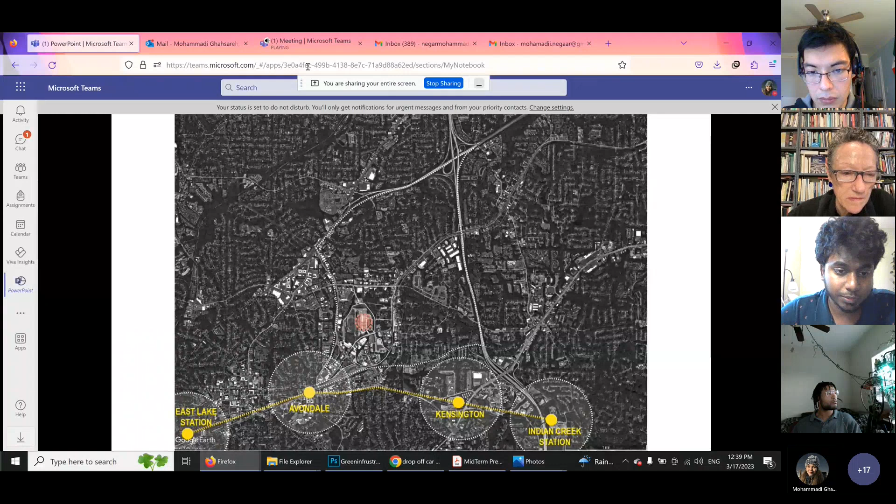The white circles are the ones with the one mile radius. One of the main things that we noticed that was important in a site was the proximity to the DeKalb Farmers Market and how users can easily access it from the closest station, Avondale. This makes Zone 4 a portal towards Scottdale.

This is also enhanced by the fact that it's run through by the East Ponce de Leon, which covers the entire length of Scottdale and also touches upon all 4 zones. So East Ponce de Leon is a crucial factor that we had taken into consideration as to how we are going to treat it to enhance the experience of this neighborhood.

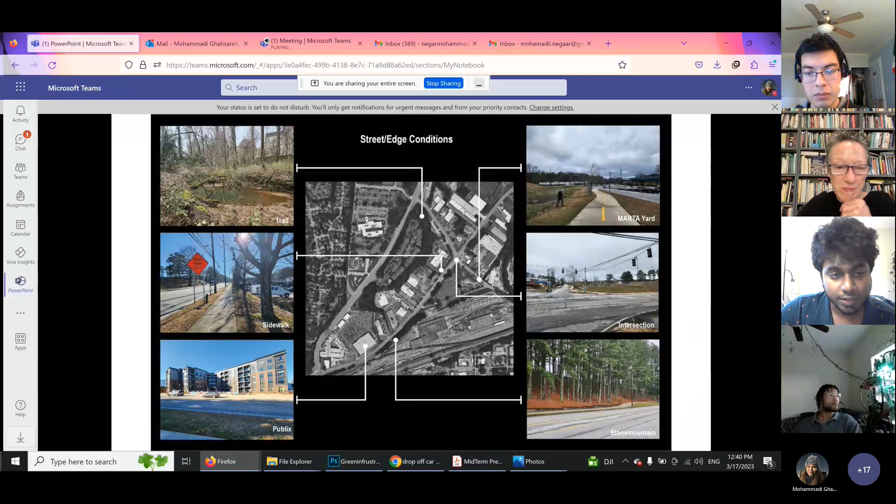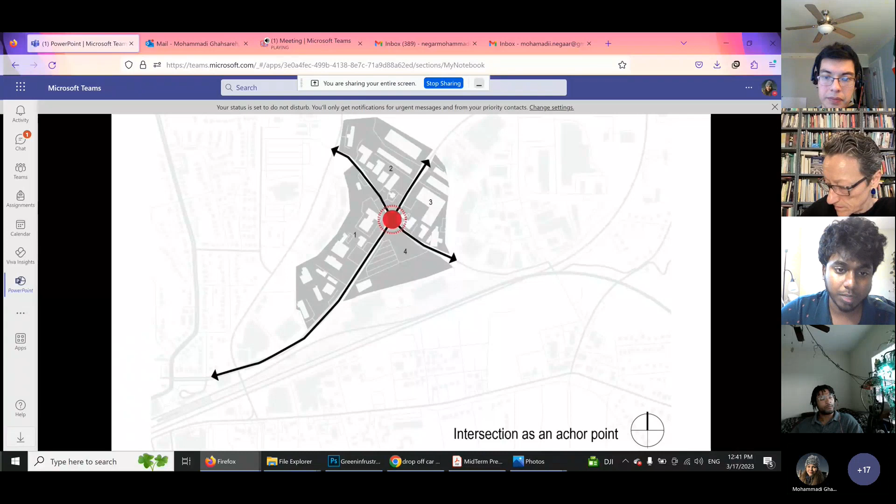As we go further, we found that this intersection demarcates our zone into 4 distinct portions. Parcel number 1 is where most of the car businesses and some Oriental market spaces are happening, parcel 2 is where a lot of dog businesses are happening, and parcel 3 has some storage warehouses and more car industries. Part 4 is where the MARTA property is, which was one of our biggest opportunities in terms of development.

We also took a study at how the density is working around our site. As you can see towards the left side, there are a lot of smaller residential units, but in our zone especially there was not much residential development taking place. So maybe that was the reason why there was a lack of sense of neighborhood throughout this zone.

We also took a look at what are the parcel allocations throughout the site to understand how further development can happen in terms of laying out roads or car-free zones.

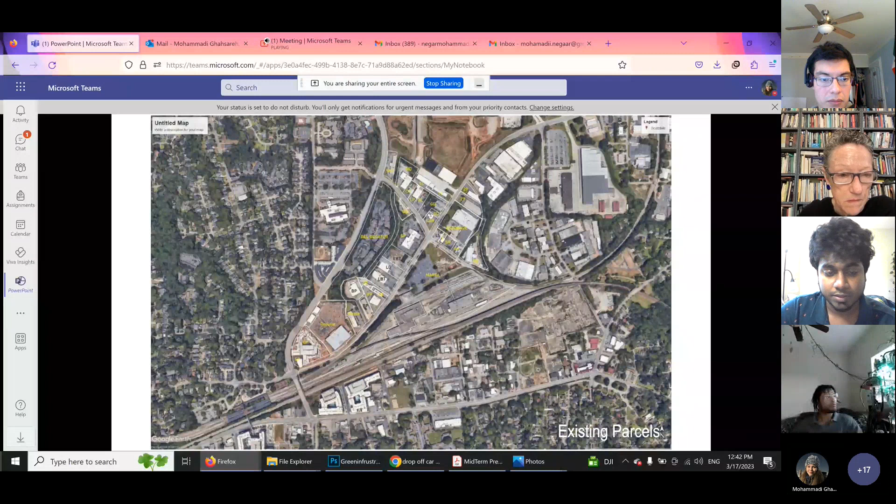There were 3 main issues throughout the site that we found. One of the first things was how parking was taking most of the frontages, because of which the pedestrian sidewalks weren't equally distributed. Most of the time we had to walk on just green spaces rather than sidewalks.

And the lack of public infrastructure throughout the area was imminent, whether in terms of recreational or leisure use—public spaces within this area were scarce.

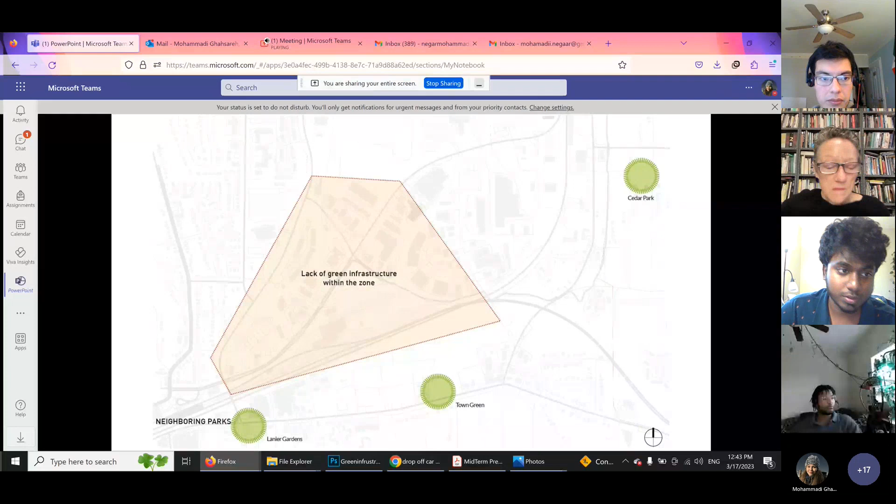Now Negar will be taking you through the approach of the design.

Hi, my name is Negar, and I want to talk about our master plan and our ideas. As Subhash mentioned, we had lots of challenges in our site, like the lack of connectivity, mobility, walkability, green infrastructure, and density. We tried to address all these issues.

At first, we realized that East Ponce Avenue is really important, as it's in the middle of our site, connecting the Avondale MARTA to the farmer's market. Also, the intersection with DeKalb Way creates a very important intersection that has separated our site into 4 different parts.

So we decided to put a mobility hub at this intersection because it would be more accessible for the residents, or all the users there, or the people who want to go to the farmer's market.

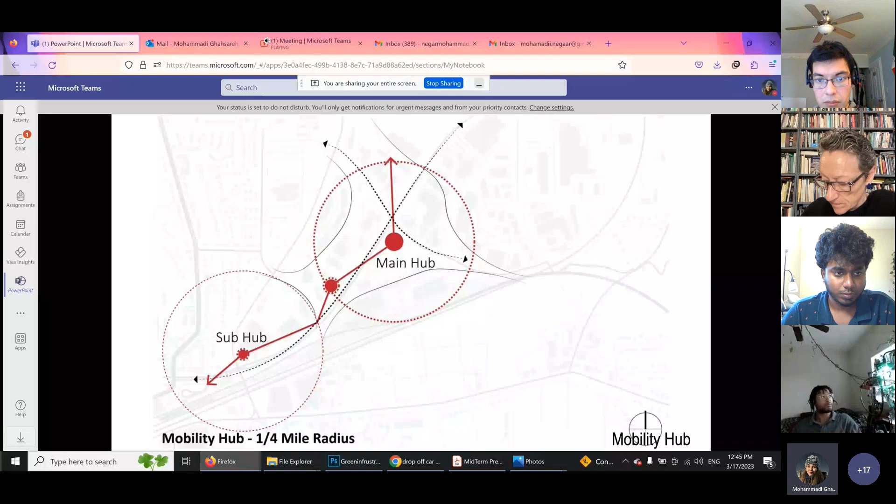We also have other sub mobility hubs in other parts of our site near the Avondale MARTA station. These mobility hubs would include drop-off areas, shared bicycles or scooters, and areas for rest with shade, making the place more pleasant for people waiting for the bus or their cars. This kind of area would encourage people to use public transportation, helping the area become more car-free and car-light.

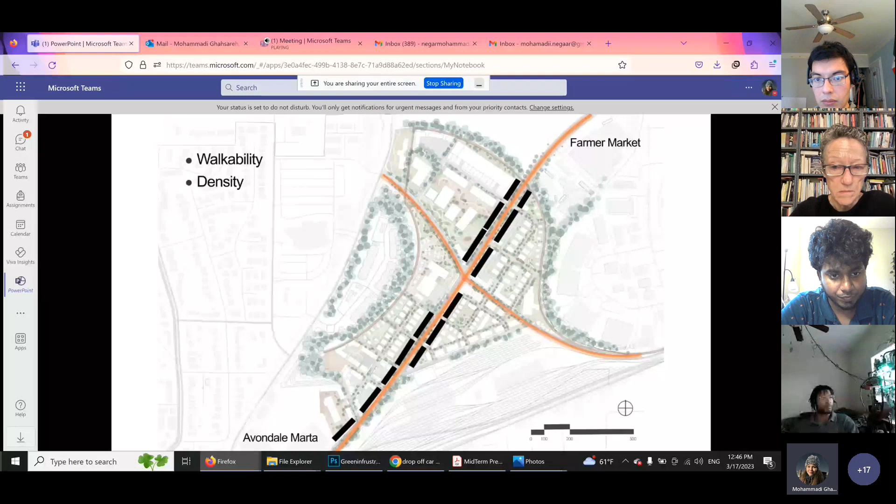The other thing that we decided is to work on the edge of the Ponce Street to make it have more density and put more buildings and retail there to activate it, so it would be safer for walking. In this area, we would have lots of retail, stores, and mixed-use buildings.

The other side of our design is about the green infrastructure. We realized we have very good green lines in our site, and we decided to connect all these lines together, thinking about how to make a strong connection between these areas with a strong green infrastructure in our site.

Now we have the Stone Mountain Trail in our site, but we decided to add another eco trail near our hard edges around our site and near the green lines. We also wanted to put more public areas in our site.

Here is the plaza at the beginning of the eco trail. This place we wanted to keep the building and make it a rec center with lots of sports park. Now we have buildings here with businesses related to dogs, and we want to keep the buildings and businesses and make this place a dog park. We also have a park here.

So our final public network would be like this - we wanted to make connections as much as possible between all these separated parts, with walkable streets, vehicular streets, eco trail, intersections, and public areas. We wanted stronger connections between all these layers.

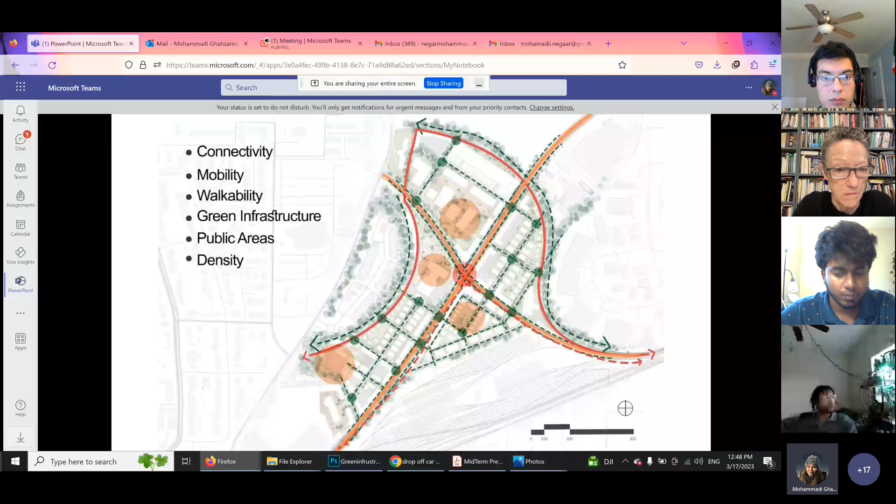For the building types, I want to start with MARTA. We decided to put lots of housing here for MARTA's workers, and in the next phases, we want to build residential on top of the rail yards.

We have the mixed-use building around Ponce Street, and all these yellow areas are the car-free housing areas, residential areas. The red areas are commercial - maybe offices, restaurants, cafes near the eco trail, and here near the trail again, also the antique shop and dog park. This area is the recreational center. And this is our final design.

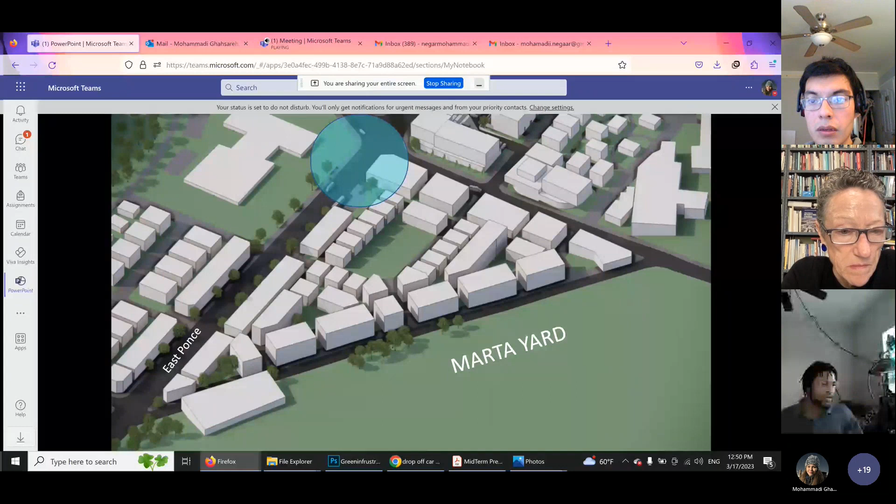Starting with the MARTA hub and MARTA yard, at that intersection again you can see highlighted where we are going to put the MARTA hub to facilitate the car-free housing that we are proposing for the site at large.

This is a view looking from the location we're planning to place the MARTA hub. This is looking down East Ponce, northeast, and you can see the intersection again that we're highlighting, and how this would manifest in reality.

Moving across the street to more of the retail and housing farther back towards the eco trail, we are connecting North Arcadia Avenue to the rest of the lower site. As you can see at the lower left-hand corner, there's Publix parking that is dividing the site with about a 20-foot high cliff, and this creates a pedestrian barrier that presents connectivity issues to our site.

So we're using this creek that runs along the apartments that are along that trail, and we're extending the path up that elevation with a plaza where those two stars are, linking the higher portion of the site to the lower portion of the site, to the rest of the development and the housing that we're proposing.

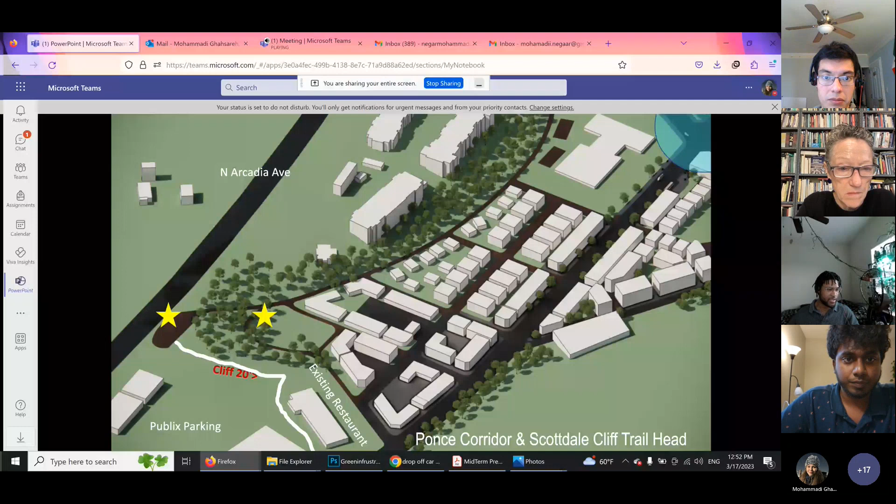These are some quick views from North Arcadia, at the top of that trailhead and lower where the creek would be. We have to add the creek, but imagine there would be a creek running along that path. That's what you'd see when you'd go to the site.

These are some views of East Ponce, the storefronts. It's actually in the wrong order - this second picture is actually in another zone, so I'll get to that in a second.

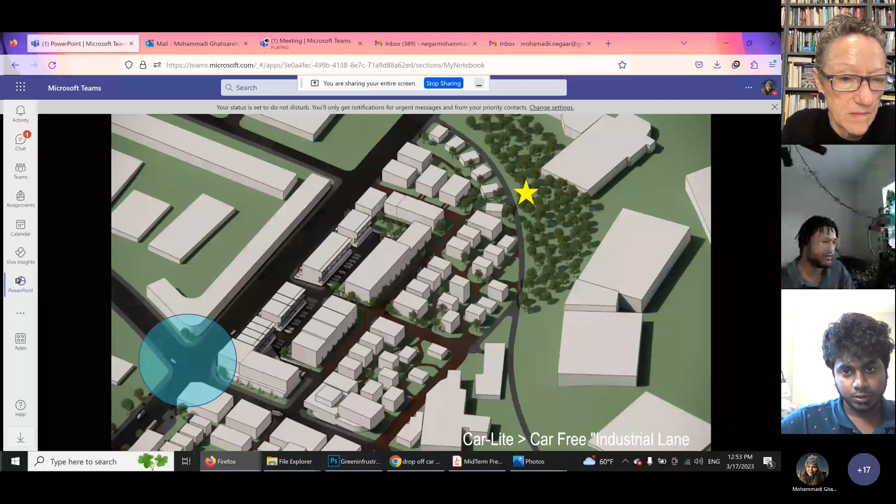That second picture was actually from the center of this car-free oriented neighborhood, at the intersection highlighted in blue. Along that street edge, we're activating with retail on the lower portion, and on the second and third floor we have apartments. Moving further back towards the star, what we're calling the industrial lane is adjacent to one of our other studio mates' sites. We have a trail running between that, extending the Stone Mountain bike path.

This is primarily to serve as a transportation artery for a lot of this car-free residential development that we're proposing. Ideally, this would be a transportation artery for alternative means of transportation, like bikes, scooters, and all the other electric means of transportation we have today.

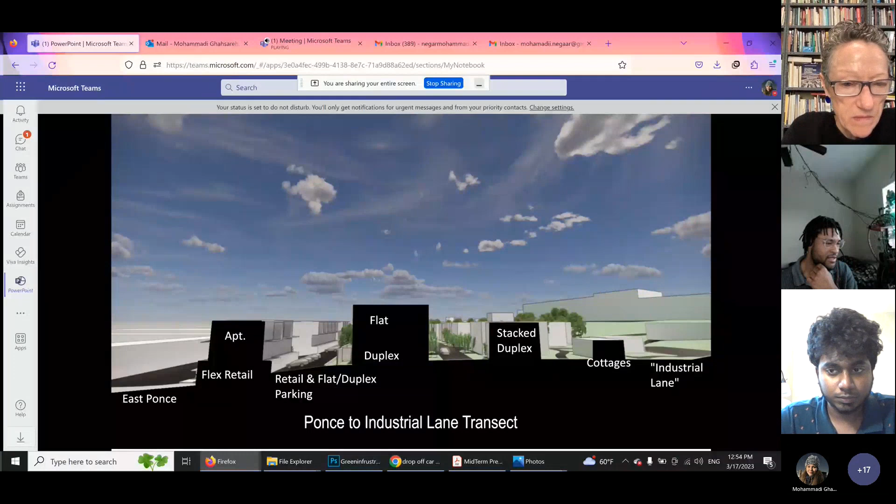Next slide. This is a section from East Ponce to the industrial lane, showing everything in between it with all the housing types. Next slide - you can see this one, same thing.

We'll just quickly run through this. One of the things that we were really excited about was the extension of the MARTA rail yard, and if we can actually build on top of it.

We're also thinking about how the density on top of the rail yard can happen - like, can it be really dense, or can it just have the character of the surrounding neighborhood?

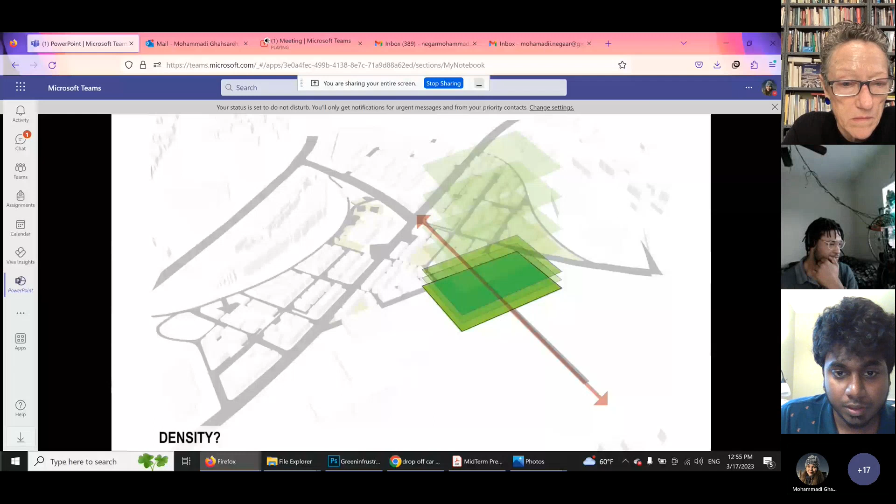This is kind of like the vision that we have for now, but this is something that we're still working on - how this neighborhood can also be a sustainable unit by itself, but also be integrated within its local context. So that's it from us.

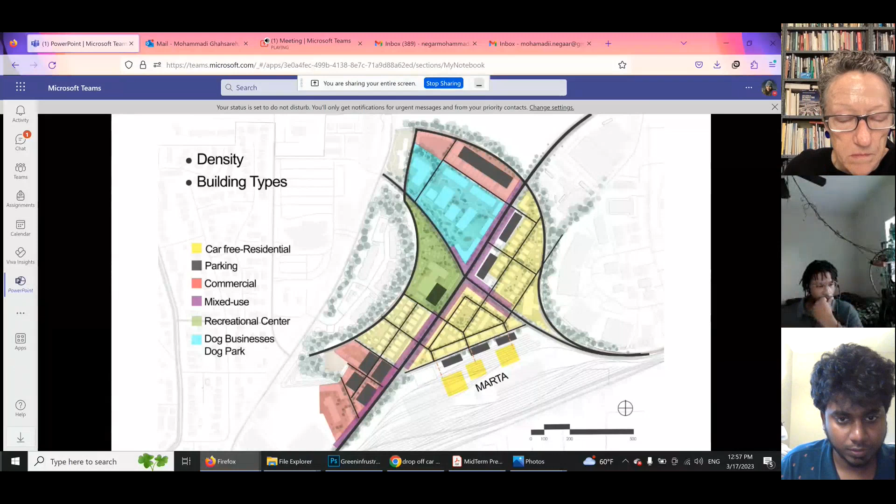The MARTA site specifically, I like the density on the surface lot. There was one image that showed parking in black rectangles on the south side before you get to the rail yard - yeah, right there. So I was a little confused when another slide later says it's car free, and I couldn't tell in the image if there was actually a place for parking, because I do think we have a chance of capturing a decent percentage of the workforce at MARTA to live in this community that would be created, but we also have folks that for various reasons might be driving from 45 minutes outside the city to get here. So I want to make sure we have that flexibility for those employees who choose to do so. But the overbuild is super interesting, super complex.

There are examples all over the country, globally, of overbuild situations, and generally you'll see most of them have very high density structures, just a function of trying to make the math work. But as Professor had indicated, that's not really what this exercise was about. So I like the idea you advanced of doing the overbuild.

I think that's really cool, but overall great job. Lots to think about, but I appreciate you guys putting your imagination to the paper, and thank you. Thank you, Jacob. Thanks.

I'll just jump in and add my two cents. This is Will with Microlife. Just to reiterate what Jacob spoke to, the connectivity of what you've put forward is great. I enjoyed you looking into the connection with the added path as well as the grid style connectivity, for the different people that live there that could walk to work or get over to MARTA. And obviously I'm a sucker for anything dog, so I appreciate you wanting to focus on the dog business and dog parks, but it's also a big thing for DeKalb County—they talk about wanting a rec center and places for people to gather.

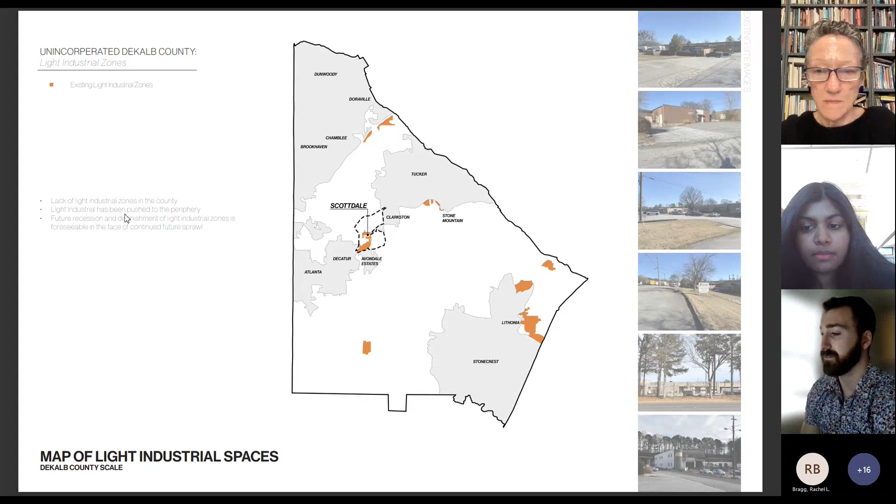Looking at a big stakeholder here, MARTA is currently employing about 755 employees at the Laredo facility, 80% of which are driving alone. If you look at this heat density map on the top right, a lot of the employees reside fairly close to the Laredo facility. About 60 to 75% of those people are eligible to carpool but don't, and about 43% have access to existing transit routes but do not use it.

On top of this, MARTA is aiming to be fully electric by 2040. Looking at the diagram on the bottom right, you can see the route off of which MARTA enters their bus depot site from East Ponce de Leon, with buses moving north to south, going through the wash bay, refueling, and then into bus parking. Employee parking is a surface lot at the northwest corner of the lot, with employee cars brought into the site off of Laredo Drive.

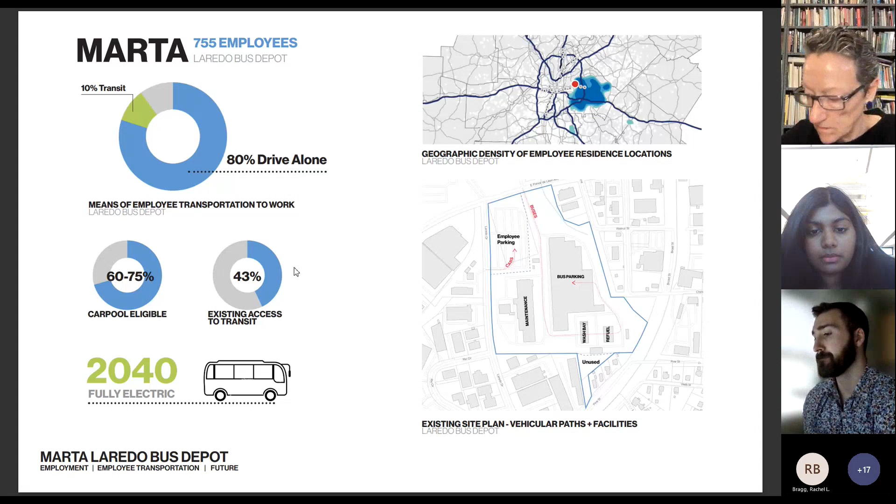So moving into our project, we're looking at how things could be here. Two main issues we're addressing are the future recession and diminishment of the light industrial space we highlighted before, and planning for MARTA's electrification by 2040, as well as addressing their workers' commute needs and workforce housing options.

This diagram shows the existing and proposed public space framework. The one on the left is existing, and on the right is one of the major changes we aim to do: rerouting the existing Laredo Drive to match up with the change in the DeKalb Farmers Market entrance that Team 2 would be proposing, enhancing this trail and adding more light industrial built fabric in the existing space.

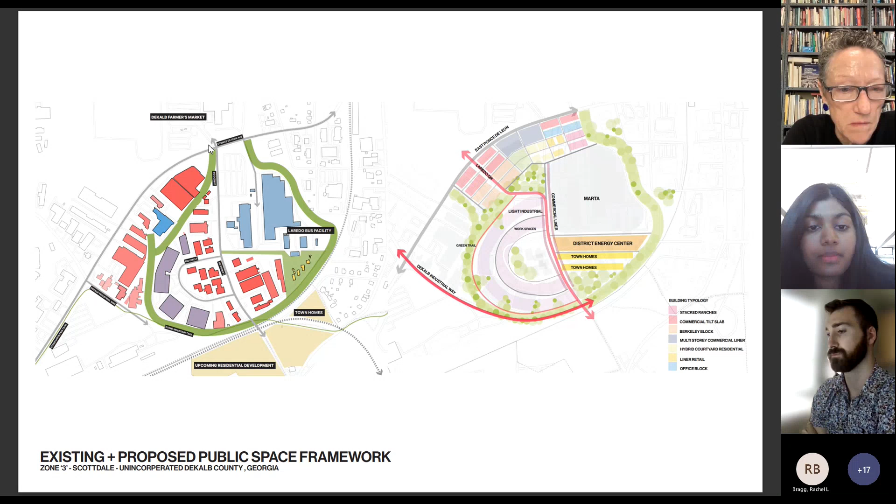Looking at our master plan, we're keeping this route down into the bus drive for MARTA's buses, as well as for public vehicles, which we're imagining will share a large shared parking garage with controlled access. Another major change is shifting Laredo and adding densification with commercial business storefronts along Laredo to change the current condition of the road. At the north end of the site, we're adding housing and car-free spaces that increase retail, mixed use, and a very diverse typology of buildings.

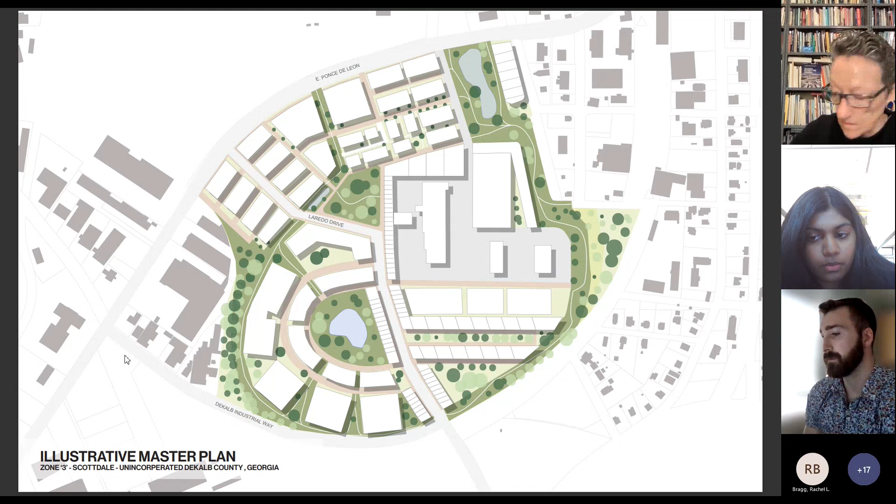So towards the north end of the site, we have specific building typologies that we thought would help us in densifying, but also diversifying the kind of buildings that we put. We wanted to put hybrid residential buildings and also commercial liners that are multi-story, so that it's sort of mixed use with offices, retail, and commercial spaces.

And then we've done a quick calculation to see the obvious conclusion that an increase in density in this area is going to increase energy consumption by some amount.

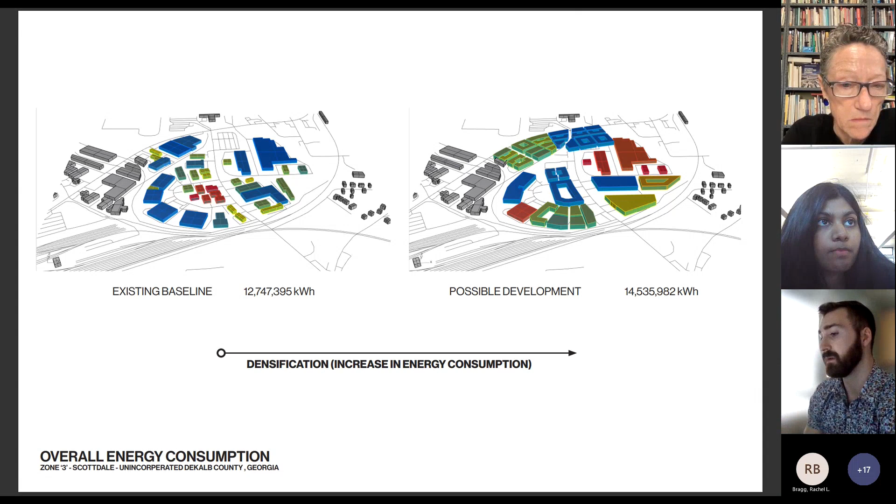And then, of course, now we're going to be looking at MARTA's electrification by 2040. And we're responding with establishing a district energy system, constructing workforce housing. We're creating live, work, and pedestrian-friendly mixed-use infrastructure. And we're planning for outdoor thermal comfort to reinforce that car-free living.

So as Matt had mentioned, we aim to create a district energy system on site. We thought it could work using the light industrial waste that could be generated, but also looking into the organic food waste that the DeKalb Farmers Market might contribute, to process it, and also to use the existing solar and other energy systems on site to create this sort of circular energy system for the site.

And by doing so, we're providing for infrastructure resilience in terms of transit. We're creating a source of sustainable energy. And then we're also thinking that this could be an economic asset for those who are being serviced by the energy that's being generated on the site.

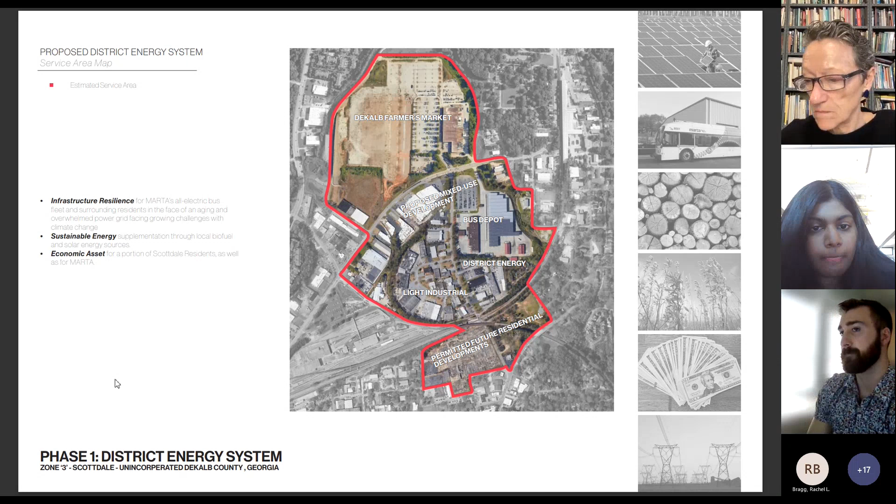And this is also a diagram to show where we see our car-lite and car-free zones, and how we have aligned our street network. There was a wind study done to understand what would enable good wind flow and movement into the site, and we coherently did our street networks according to that.

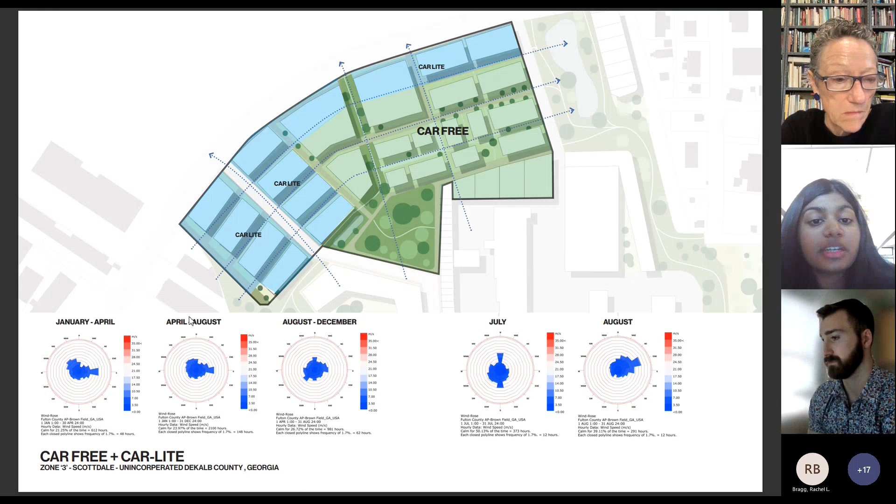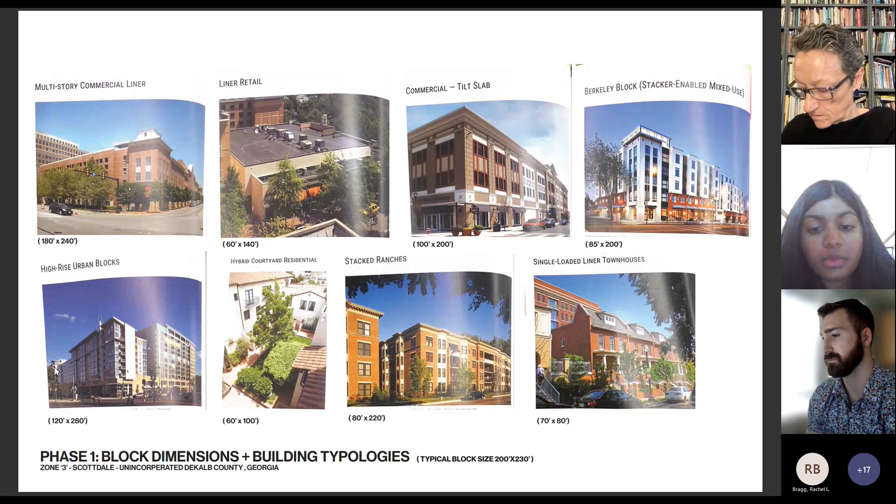So this is just to emphasize on Laredo Drive again. As you can see, there are smaller parcels that we have shown here, to establish a sort of densification along Laredo. We wanted to make it more pedestrian oriented, with pedestrian oriented businesses present, so there is interaction between the businesses and people walking by. We wanted to keep the scale smaller, looking at these liner retail type buildings along this edge.

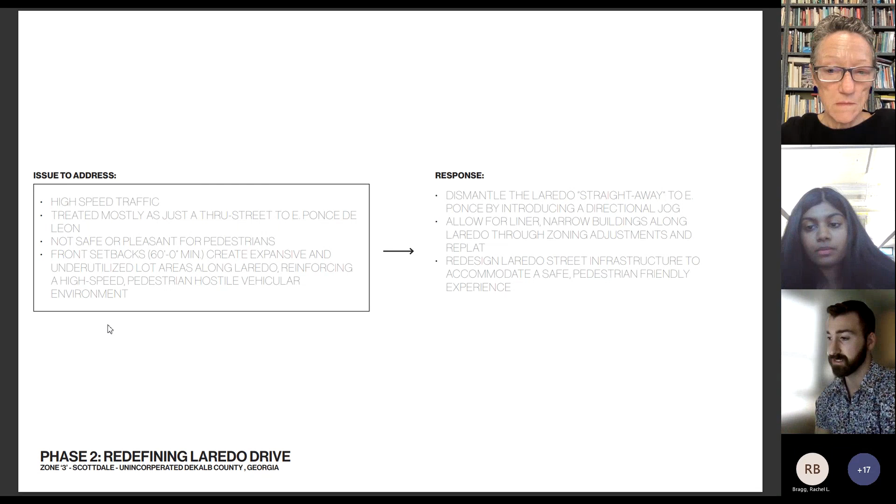Our biggest concerns are the high-speed traffic. It's being treated mostly as just a through street to East Ponce. It's not safe or pleasant for pedestrians, and the front setbacks, according to the zoning code, have to be a 60-foot minimum. We see an opportunity to close those setbacks by adding storefronts, reinforcing the idea that traffic should be slowed and this is a more pedestrian oriented space. That's why we're looking at dismantling the Laredo straightaway as it exists, accounting for those liner buildings, and redesigning the Laredo street infrastructure to be less of a road and more of a street.

So these are some of the smaller scale businesses that I previously discussed along Laredo Drive. We wanted to enhance it as a street rather than just a roadway. These are the liner retail buildings that we're looking at.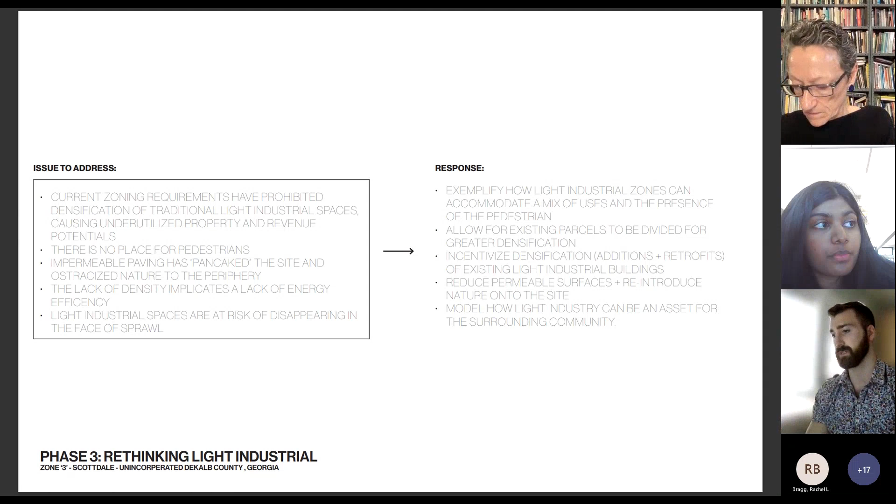The issues in those light industrial spaces are the zoning requirements that have disallowed densification of the traditional light industrial space. There's really no place for pedestrians. The impermeable paving has pancaked the site and ostracized all of the nature to the periphery. The lack of density implicates a lack of energy efficiency, which we showed before, and the light industrial space is at risk, as we've continued to say.

So we're going to try to keep the light industrial space present. We're going to try to bring in the green spaces and the pedestrian sphere. We're going to allow for existing parcels to be divided, and we're going to incentivize densification of existing light industrial buildings.

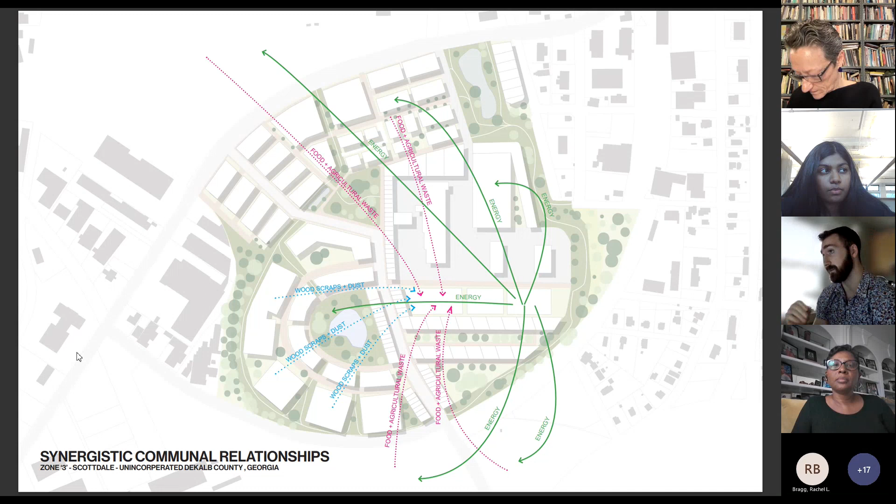This is again a diagram to show the different kinds of resources that we'll be using for supplemental energy production on our site, in the district energy center.

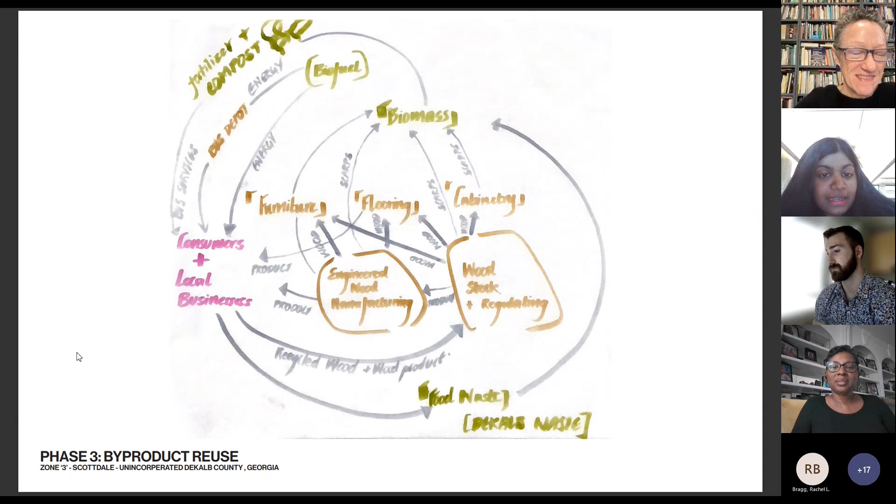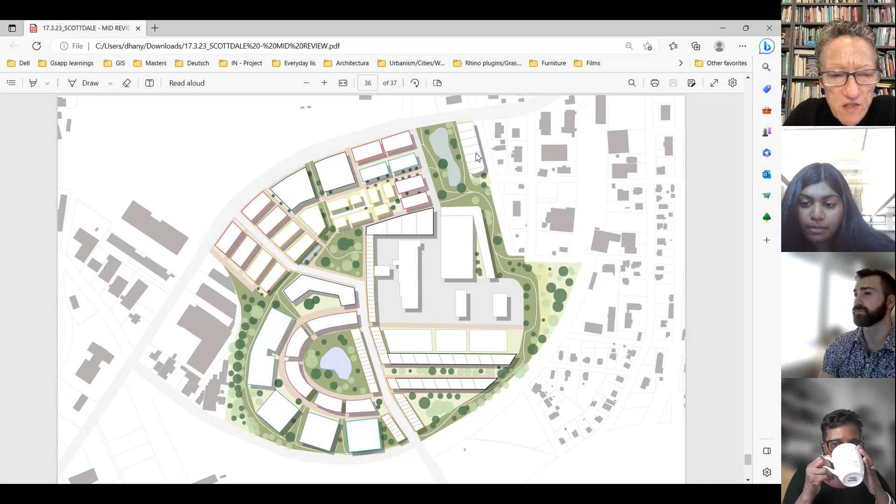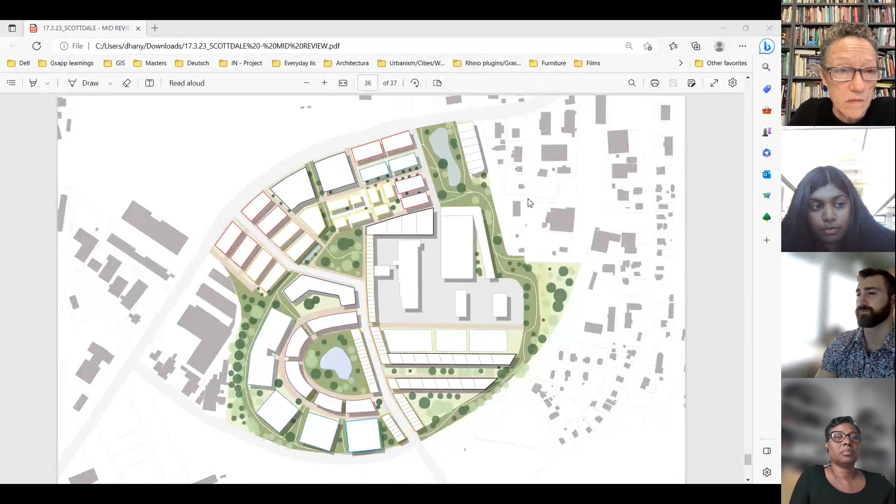Great point, absolutely. Different suggestions might have different levels of feasibility. If you group it all together into one, that might give the impression it's all or nothing, when some of the suggestions could be incremental improvements you can make, even if you can't do most of your suggestions. Which I think they absolutely could.

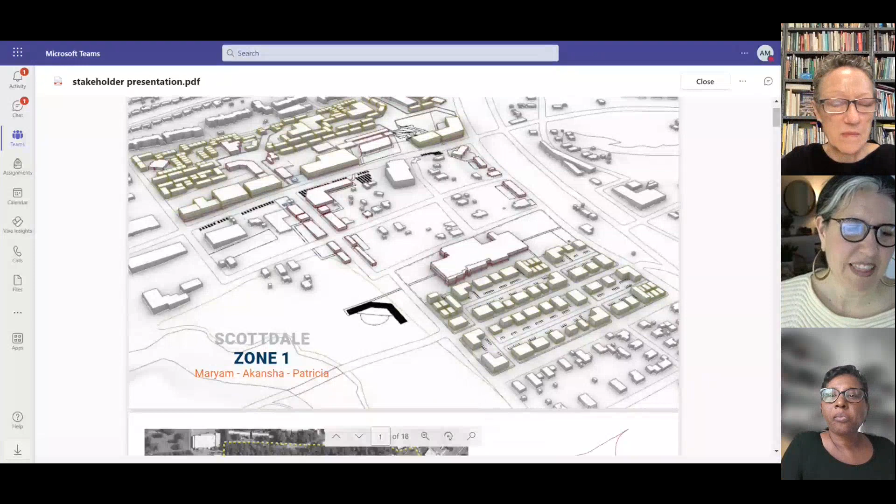Akansha, you okay? Yeah, I don't know why it's acting up at the right time. Just give me a second, please. Should we? I'm just going to share. Akansha, would you like us to? We can switch to team 2 and come back, give you time to figure it out. Did you? No, you got it. Yeah, awesome, okay, cool. Okay, sorry, I'm Akansha, and we are, as Patricia said... Go ahead, Patricia. All right, I think we can move on. Is it now moving the screen? Yes, perfect.

Okay, so this is where we're at. That big road that you see in the upper quadrant is North Decatur, and it is intersected with East Ponce to the east side.

We have three main drivers to our project. We felt that in our site visit, we met many of the residents, and what we were really told to do was to forage around for a town center. The responsibility we heard was that we still needed to honor very much the artistic community we saw within that neighborhood, and also support self-sufficiency. We studied what was available, and of all the amenities within all of Scottdale, what came forward, not surprisingly maybe, was a strong emphasis on the arts. So 11% of all the amenities in this fairly small community is all arts related.

Our zone is the most residential, and it's not very dense. When we did a study of walkability, it had a score of 45 out of 100. Our aim is to get it closer to 100.

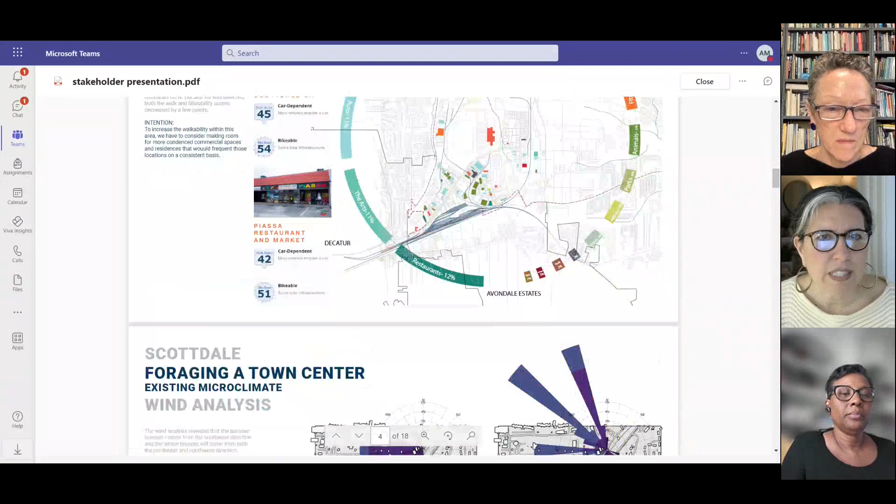We did some environmental analysis on wind and on solar. So we're showing you the wind first of where it comes in during the summertime, which is the southwest, and where it comes in in the wintertime, which is the northwest and the southeast. The wind, fortunately, is not so strong here in Atlanta to cause major design interventions, but it is something that's nice to have.

A cool breeze in those hot Atlanta days is fantastic. The solar analysis is probably the more significant one. So we really need to be concentrating on shading due to the intense sun, both in summer and winter, that affects this area and all of the city.

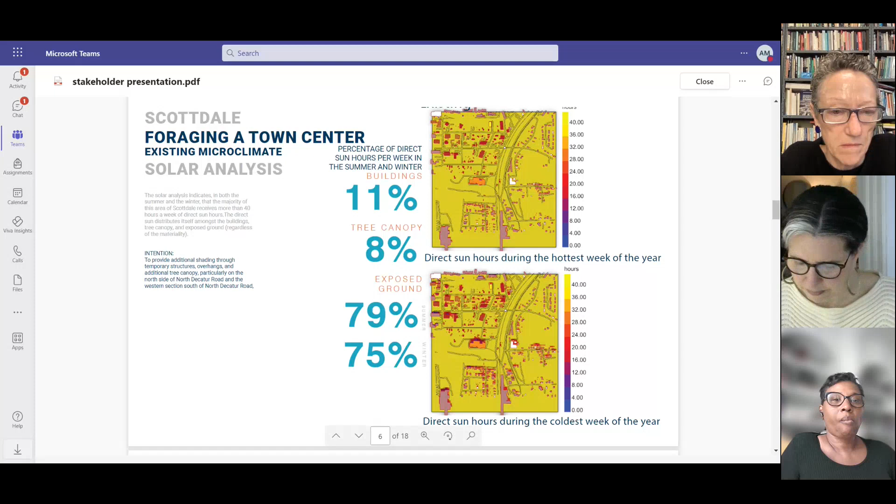When we went on our site visit, the intersection of North Decatur and East Ponce was where the community said we really needed to put the town center. However, that is the low point of that line, and so it would be a hike to get to anything that was available at the high point. So you're going to see shortly that we're proposing actually that town center being shifted a little bit west, an intersection that is street accessible.

Okay, so based on the analysis and the drivers, these are the outcomes we would like to produce that will result from our proposal. So to say, the design strategies would be to slow down traffic, create more mobility hubs, increase walkability, have more micro businesses engage in the area, a resiliency hub, and definitely open the public access to the creek.

So our master plan is mostly divided into 3 incremental phases. This is the Mill Village, definitely the storage area, the southern side of North Decatur, or one part of our town center, and the super block that is above.

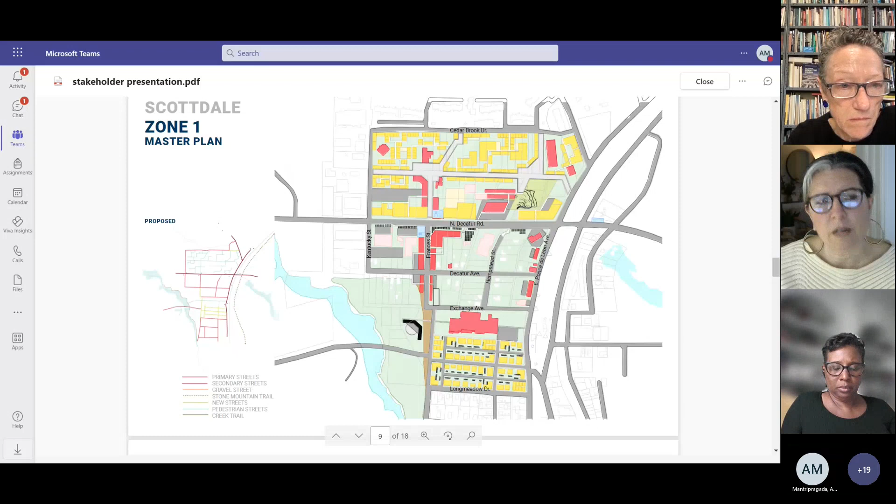But also a future resiliency hub, which I'll discuss in a slide or two. Also, we would like to have more pause points or nodes at intersections of streets that would probably enhance the experience for a person walking along the street. That would also open up more open spaces towards the creek, an OAT or an open air theater, so to say, a playscape that is on the super block, and incorporating more patios.

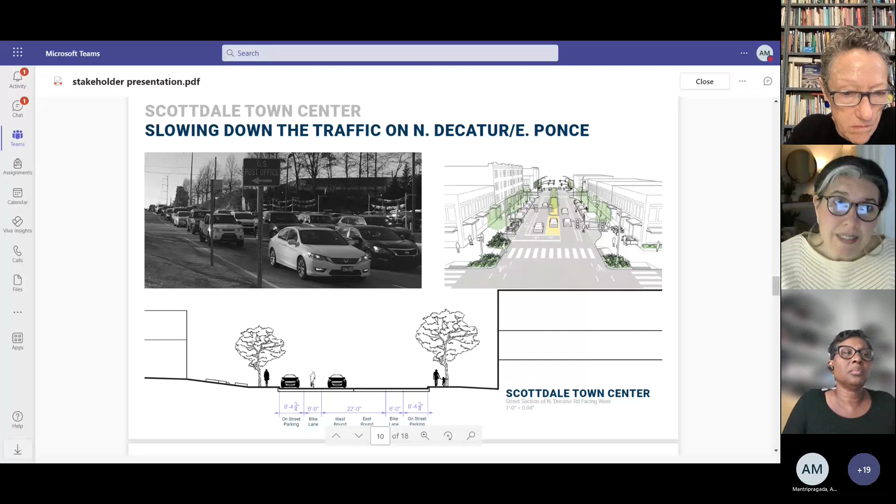One of the main things we need to do is address North Decatur Road, which is an intense place to drive, let alone walk. As you can see from the picture on the left, we propose a road diet along the area we're trying to build out as the main street. The picture on the right shows one of those proposals, and the section below shows how we would reduce the existing street down to on-street parking and bike lanes in the eastward and westward directions.

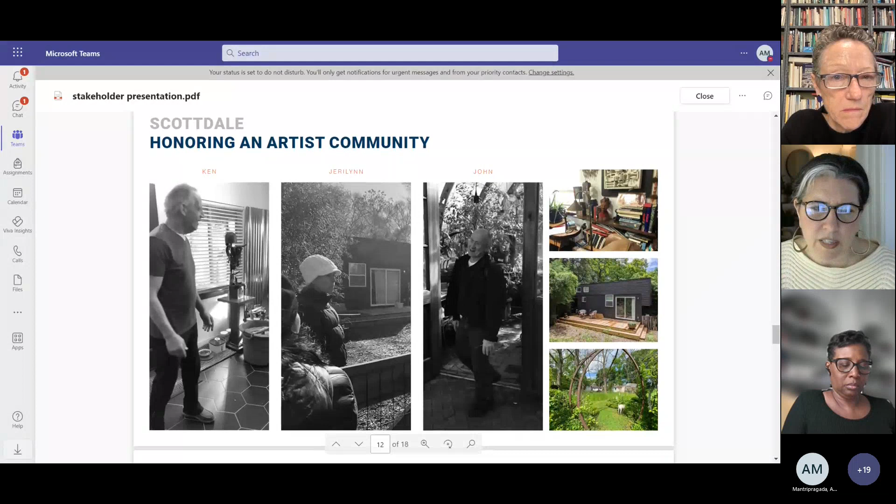As I mentioned, we got to meet three individuals who immediately opened up their homes to us. The common thread amongst them, aside from their craft-making skills of sculpture, greenhouses, and entrepreneurship, was an artistic vein. That's really a precedent and priority for us moving forward.

As Patricia already talked about slowing down traffic, we believe North Decatur Road needs a town center. We've shifted the town center to the intersection of Francis Street and North Decatur Road, because it's on higher ground and easier for pedestrians to access. North Decatur Road is more car-oriented, but Francis Street is going toward car-light and car-free zones. We're also trying to incorporate an art corridor from the intersection that would enhance the experience while walking down the commercial corridor.

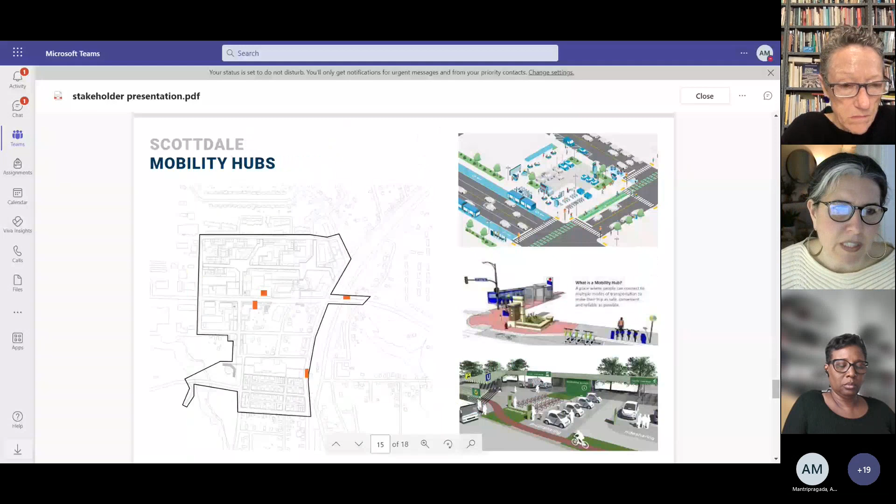To support that, we need mobility hubs that would create a transit-rich experience. The squares or rectangles in orange show where we would propose that. Some precedents on the right show what gets included in mobility hubs for people to have greater access.

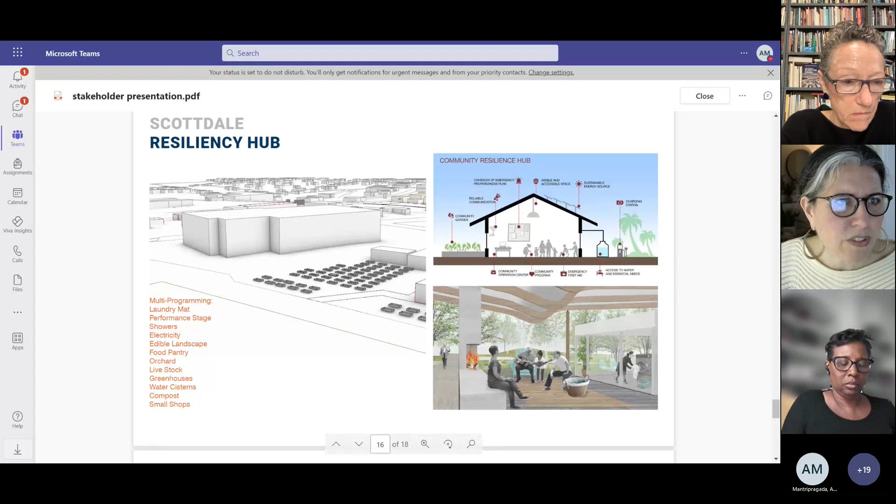I mentioned there was this pink building, a storage building, that we wanted to turn into a storage unit for self-sufficiency during climate crises. However, we hope climate crises will never be something regular, so we also want to make it a mixed-use space with commercial spaces for daily use. These are some things included in resiliency hubs: cisterns, community gardens, a laundromat that's accessible because of PV panels—self-sufficient in that way.

Overlapping this with the environmental analysis, we believe our design incorporates wind analysis and solar with proper shading, creating thermal comfort for someone walking down these streets.

We want to densify it so that if we retrofit the mill similar to Studioplex in Atlanta, with commercial space, there would already be residents there to help support that business, along with visitors coming from the DeKalb Farmers Market just east of the mill.

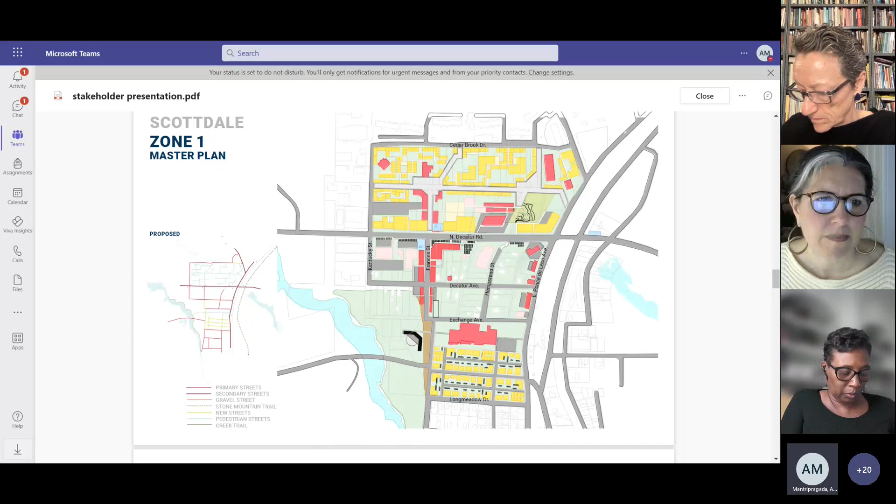So actually, we've got one more minute. Just to clarify your question, what you want help on is what other activities to continue thinking about for your town center, or what exactly? Either that, or any other intervention they can see that would bring us all the way to Stone Mountain and make that connection to the trail.

Well, I guess, George, the trail really goes—I can't draw on the screen, but right at the Mill Village, that railroad crossing, where Clarendon hits Ponce, that's where the trail basically is. Going under the tracks is the difficulty because there's only so much room under that overpass, but right there at that little Clarendon and Ponce where it hits the Mill Village, it's just a train crossing at grade.

Looking at it, I think another value to get to the path would be right at North Decatur and Ponce. As you noted, it's a very busy intersection, and the tracks are above. If we're going to put the town center at the top, some way to connect to that path is by looking at that intersection and the walkability of getting to the path on the other side of the tracks, across Ponce to North Decatur. I think connecting that, and looking at that intersection to the path, is really valuable when you're considering the town center at the top of the hill.

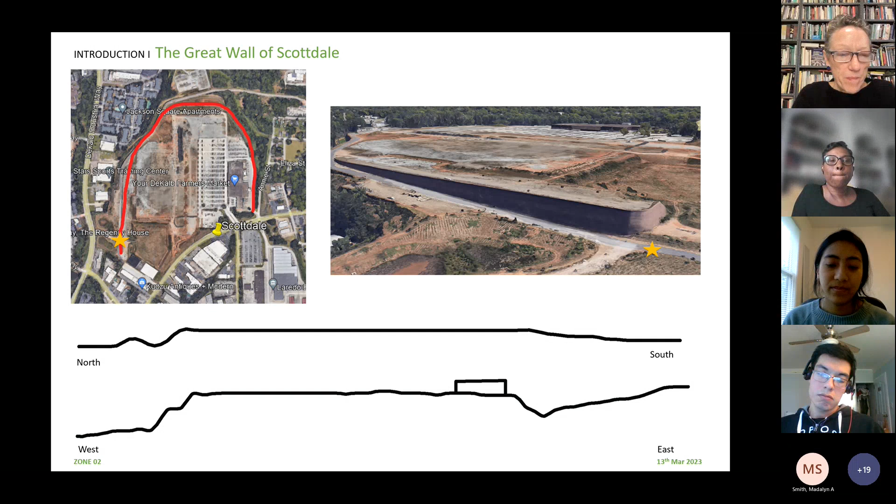Overall, as you all know, it's a very limited access site. The main access is coming from Ponce de Leon because it's surrounded by, which was great to learn at the earlier stakeholder meetings, what's called the Great Wall of Scottdale, and that is extremely apt. So what we're focused on is really increasing north-south connections and east-west connections, and also working to fit in the vision of the owner of the property, Mr. Blazer.

As I said earlier, he has over 140,000 square feet of retail and warehouse, and it also currently has over 700 parking spaces. What Mr. Blazer is proposing is close to 1 million square feet of additional retail and warehouse and over 3,500 total parking spaces. This represents a very traditional mode of development with warehouse and surface parking. And we believe that there's a great opportunity to redefine and refine this vision.

Mr. Blazer stated, my stand is for life to work free of scarcity and suffering for future generations. So with that in mind, we want to envision an enhanced DeKalb Farmers Market that reflects the owner's philosophy of connecting people and food. We see three major steps to achieving this vision: first, to unlock the development potential of the site; second, to enhance mobility; and third, to incorporate green and eco-conscious design.

This is the proposed master plan, just an overall look at what we are proposing. It includes retaining the existing and proposed farmers market buildings and connecting them with a large green space. And again, enhancing the north-south and east-west connections through the site.

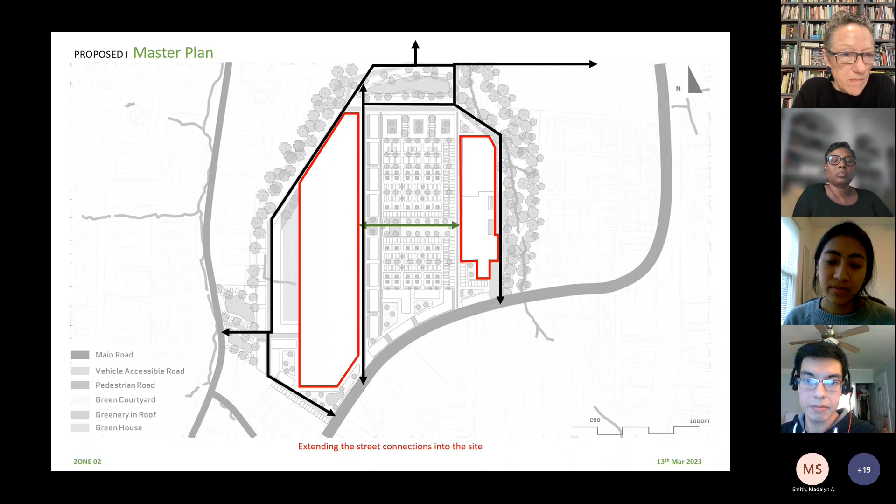We're also proposing a car-free zone. This would be a car-free neighborhood scale development. We have three different districts. The car-dependent districts are the ones serving the farmers market. Obviously this is a regional draw that people are driving to, so we're definitely maintaining parking for those areas. But then the rest of the site goes car-light or car-free.

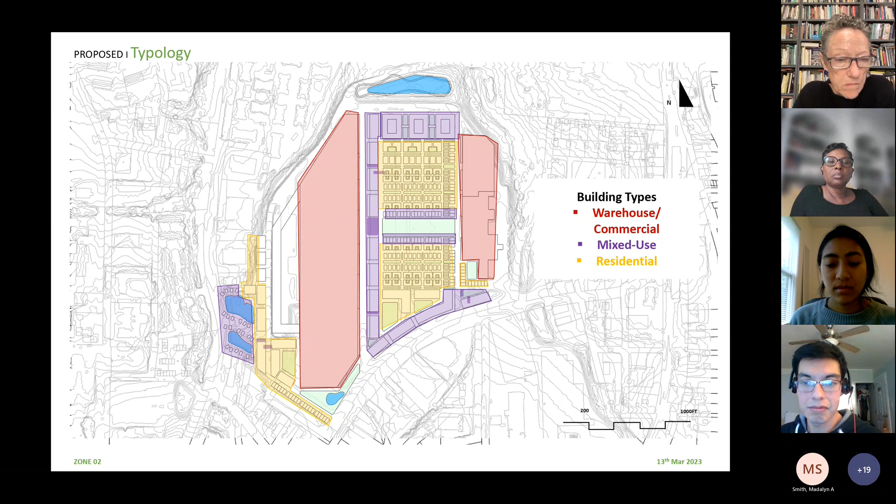There are also three different typologies that we're proposing: again, the warehouse and commercial for the farmers market, mixed use buildings, and then smaller scale residential properties. Those smaller scale residential properties are what's called missing middle — typically 2 to 3 stories, low rise but higher density than your typical single family home.

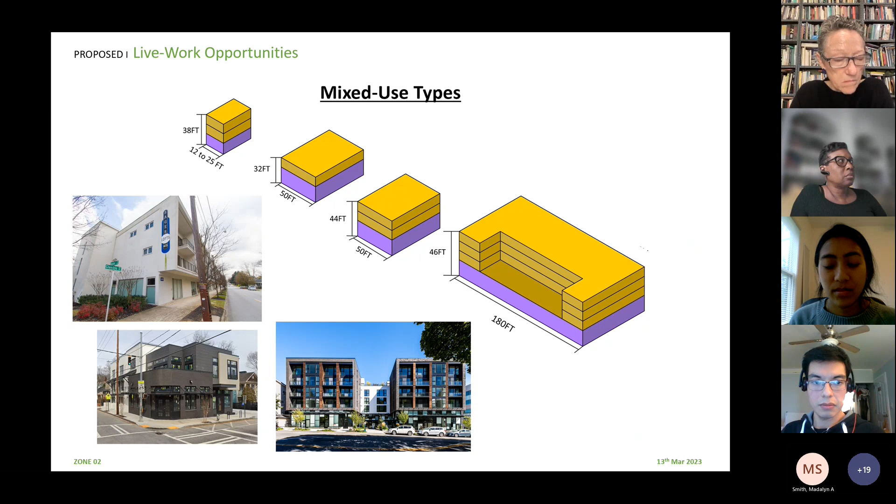And then our mixed use types, which have ground floor commercial, office, retail, and then upper floor living spaces. And then this is our proposed street. Anu — oh, sorry, go ahead.

It's Anu, right? Okay, so like Madalyn explained, the connections that we are extending north, south, east, and west. Here we are proposing four types of routes: the car route in red, and in yellow the service route for trucks for the farmers market warehouse.

And then we have streets that are fire accessible, pedestrian streets, and they are 30 to 40 feet wide. And then we have pedestrian streets that we can talk about later.

Next slide. And then the grid in purple — the purple streets, which are fire accessible pedestrian streets — they are in a grid, like we can see here.

So we wanted to bring a different variation within the grid. We played with the building typology and orientations. Regarding orientations, we did simulations on solar and did solar analysis. Based on that, we found out that the linear orientation works best for the climate.

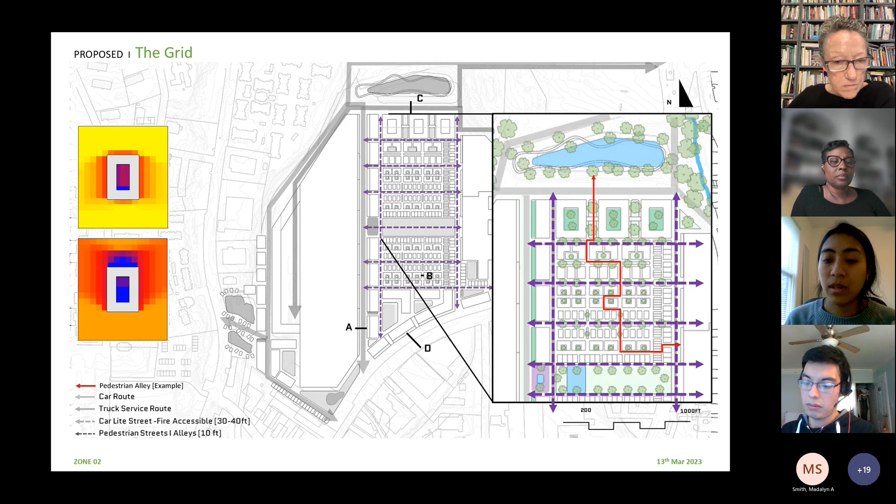When we look into the open space framework, the main green open space is in the central area, and then we have pockets of green spaces throughout our sites, as visible in the diagram, and they vary in scale.

The green spaces are public, semi-public, and private. The public ones are the central plaza and the streets, while the private ones are the private courtyards incorporated in our housing typologies, and there are also semi-public spaces in different parts of the site.

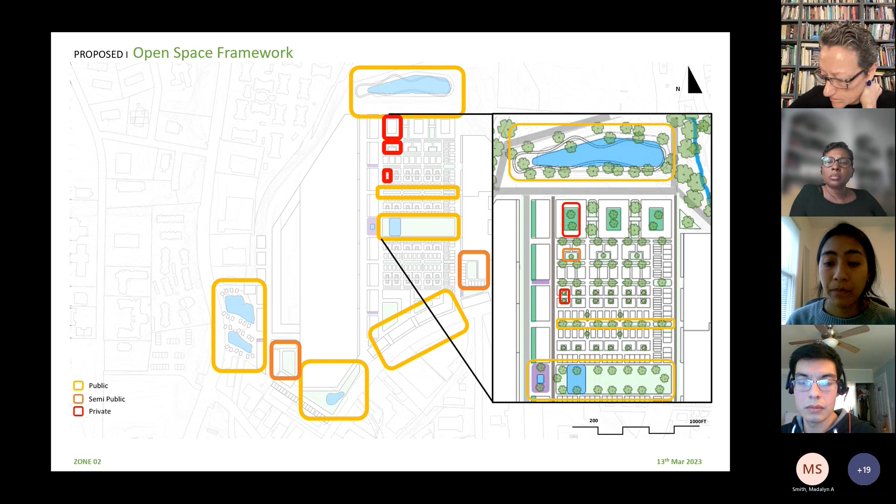This is the overall master plan view. We can see how the massing is done and how we are incorporating different functions like residential, retail, restaurants, warehouse, parking, farmers market, greenhouse, and offices in our site.

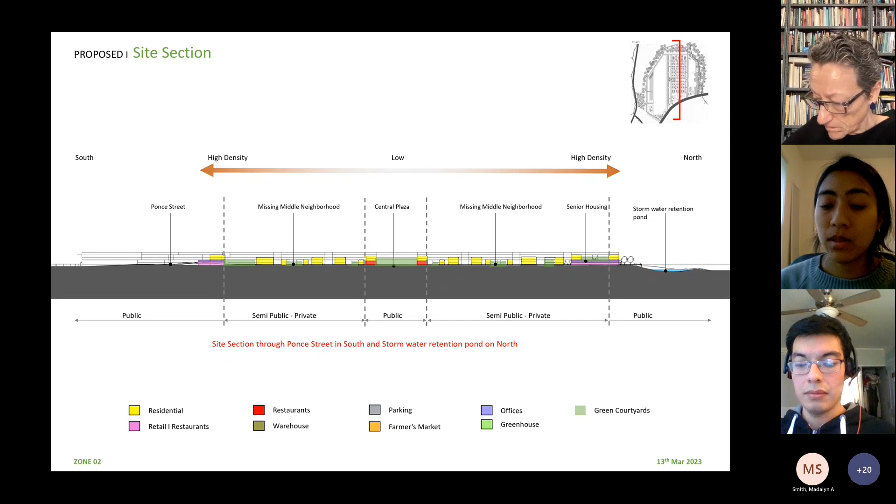In the central area it's like a missing middle neighborhood, as Madalyn explained, with the center plaza. The density is higher on the edges while it's lower in the central area. We are incorporating senior housing towards the north, where we can see different public and private spaces in the courtyards, in the form of green courtyards.

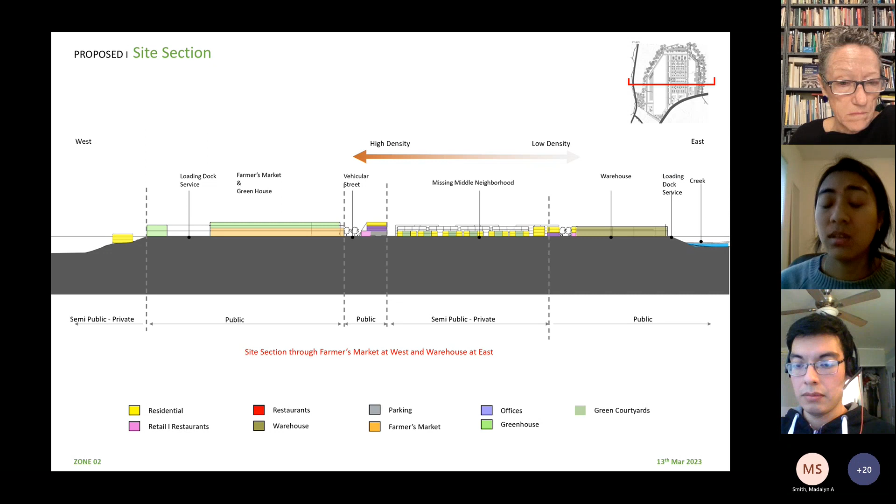In the middle there is a missing middle neighborhood. So the density here - along the streets there is high density, like four-story buildings, while on the right side it's missing middle, around two-story buildings.

So we are targeting our performance analysis, looking into solar analysis and renewable energy, rainwater harvesting, and walkability and bikeability.

One of the ways we are achieving a more walkable and bikeable Scottdale is by increasing connectivity, not just for cars, but for public transit, pedestrians, and cyclists. Currently there are really no pedestrian facilities on the farmers market site, so all of our street sections incorporate wide sidewalks and lots of trees and greenery.

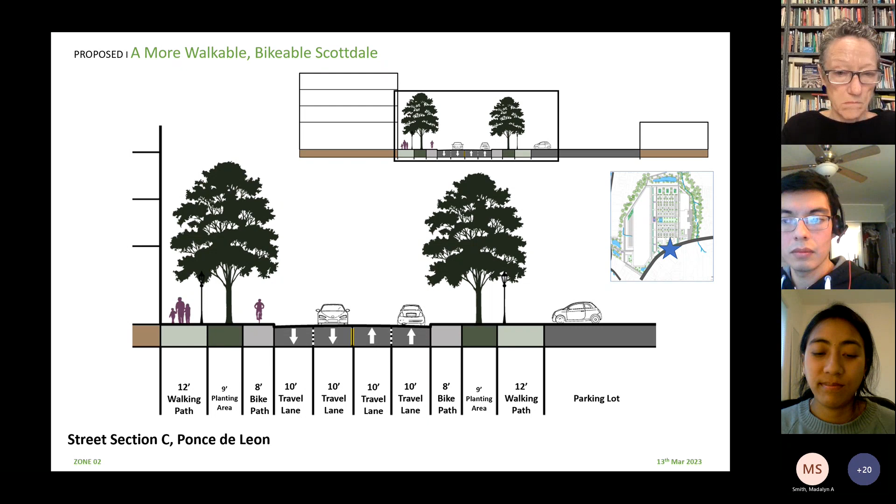This is the street section from Ponce de Leon, a really important street connecting not only this site but all of Scottdale. It's the one this property has the easiest access from. We're prioritizing wide walking paths along Ponce de Leon and grade-separated bike paths, since it's a state-owned road with fast traffic, so separated facilities are necessary, along with planting trees to provide shade for people walking and biking.

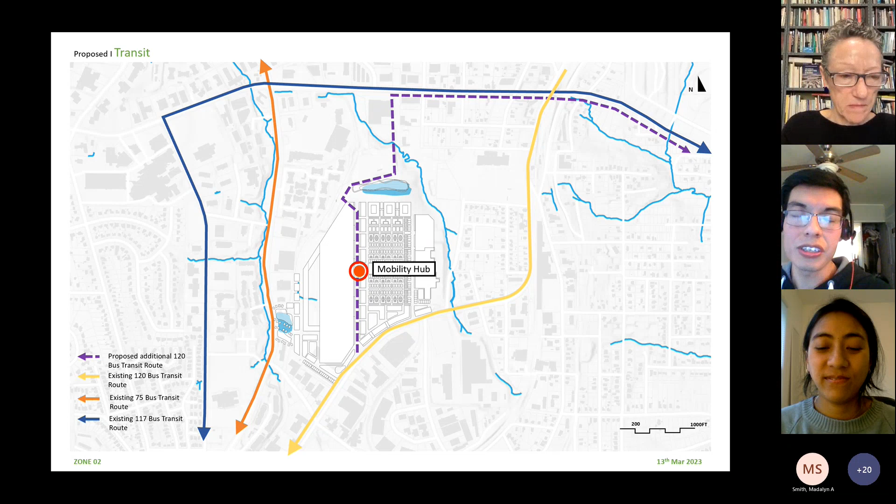At the center of this community, you would have a mobility hub that would be the extension of a bus route, route 120.

At the mobility hub, you would have a series of spaces that let people wait while they go to the farmer's market or walk around the site.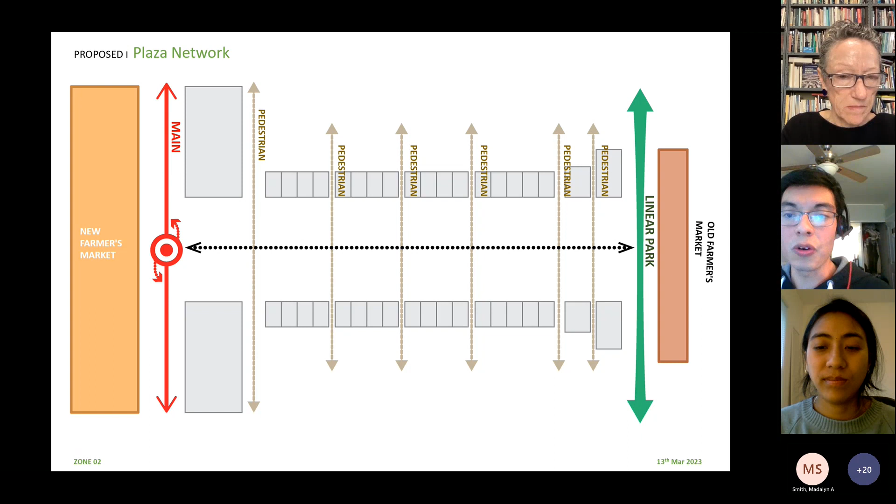The mobility hub would be the genesis of a plaza we wanted to incorporate, with a series of restaurants and amenity spaces that expand into this plaza.

At the plaza itself, you would program it to have different activities and really bring it to life, with this view showing different opportunities for people to come, gather, play, and interact with each other.

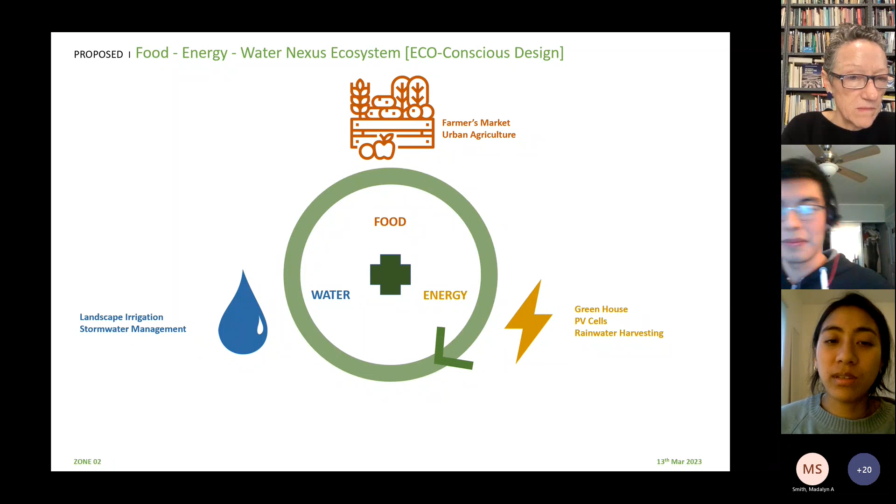We are proposing a food-energy-water nexus ecosystem in our design.

We are proposing photovoltaic cells and rainwater harvesting on the roof.

When we look into the site and the timeline of what changed in topography and greenery, that will have an adverse effect on the natural ecosystem and give rise to unforeseen future problems like stormwater runoff, flooding, etc.

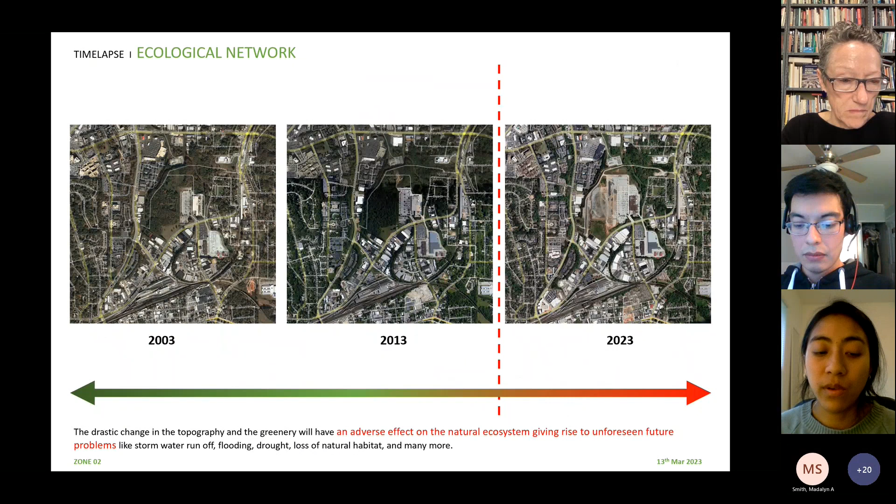Realizing the importance of the ecology and green ecosystem, we want to retain it and keep the greenery as much as possible on our site, continuing to the walking trail on the other sites, zone 4, zone 3, and zone 1. We are providing green amenity to the car-free and car-light neighborhood, and increasing groundwater infiltration and biodiversity.

We are creating an eco food community, proposing agri-landscape as a bridge between community and food. We want to give back to the community with low maintenance planting in the form of agri-landscape, and it will be a model for an eco food community.

We are also proposing trees that reduce carbon and improve air quality, health, and greenery.

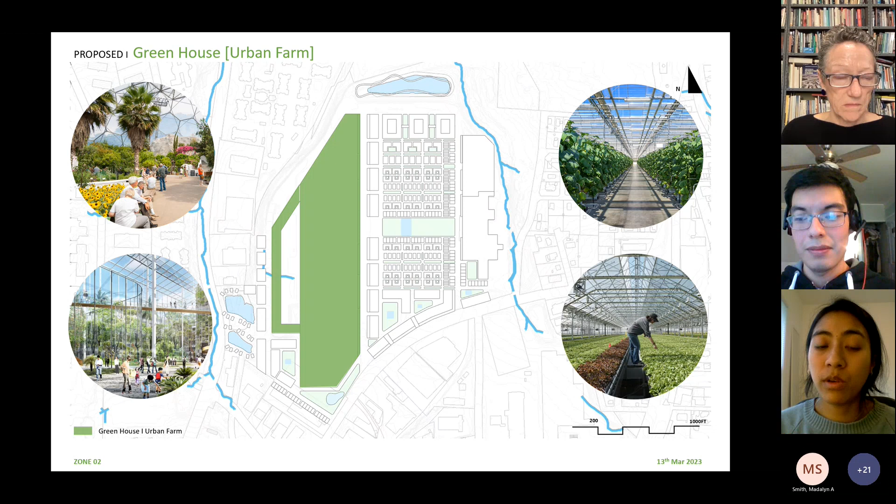We are proposing a greenhouse above the proposed farmers market.

We are also daylighting the drain and creating an ecological network of water bodies through stormwater management ponds, bioswales, pervious ground cover, and French drains.

We are proposing stormwater retention that will also help in filtration and reduce CO, helping with CO2 absorption. We are proposing agri-landscape with low maintenance CO2 absorption using reed beds and seaweed, and also adding a natural boardwalk as an amenity around the stormwater retention pond.

About rainwater harvesting, we are doing it in the neighborhood area, and this is the basic calculation we got.

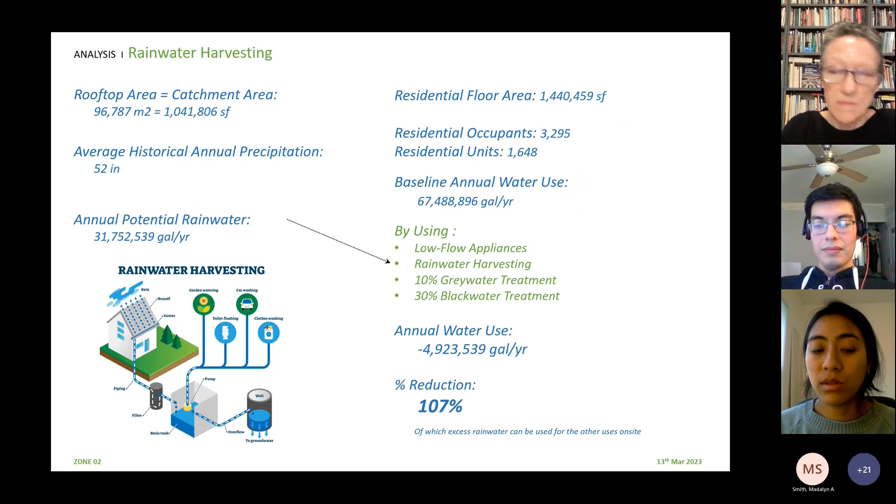I think we should take this to Mr. Blazer right away. I really agree, but Commissioner Terry, we don't know how to reach them, so if someone wants to introduce us, please do. Is Kathleen on the call? No, she could not make it today, she's going to watch the video. Okay Kathleen, if you're watching this later, we just need to circle back with Kathleen and ask her to help facilitate that. Commissioner Bradshaw also said he seemed to indicate he could introduce us.

Is Alicia on? I am. Alicia, can you help make a connection? We'll do our best. I know that he met him some time ago, but I'll follow up with Commissioner Bradshaw. Okay, great, thank you.

I wanted to say I think the better use of the parking area was the best part. Absolutely, I think everyone's in that mindset here. Could you all go back to the master plan, please? Yes, thank you.

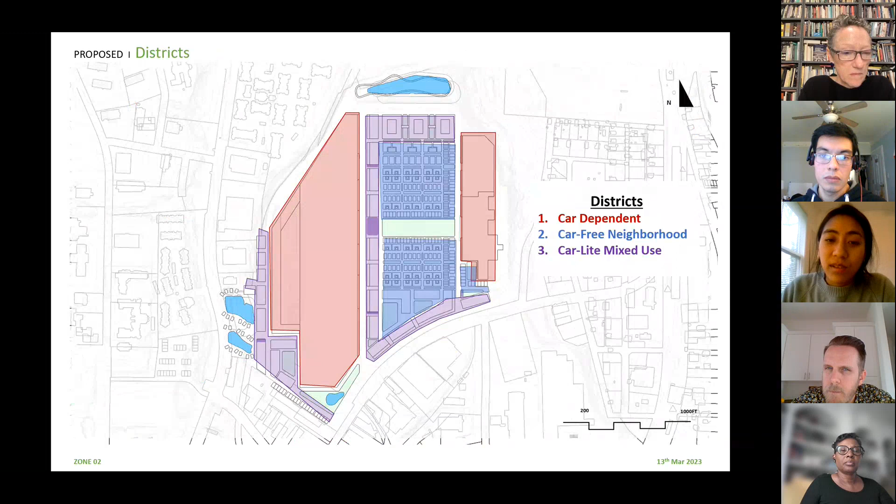And so the question I had was about the parking area. So in essence, I think I missed that part. So it'd be in essence like a deck, and then the plaza will be on top of the deck. So the parking deck would be on the southern end of the new farmers market. That's our current plan.

Gotcha, okay. And then what is this, what is the other little gray strip there? So this is a building typology. This is a very rudimentary section showing, but you would have a little bit of retail or office, some sort of mixed use, and then upper floor residential, and that would cantilever over just some surface parking that would mostly service this retail right here. Gotcha, okay, great, thank you.

I thought the plaza connecting the two was wonderful, and also kind of sectioning out which area is retail, restaurants, gathering. I enjoyed seeing that thought put into this, as well as showing that we can create a great density where people could walk out their front door, and Ellen, you could go get your cup of coffee at the farmer's market. So that would be amazing.

So Alicia, looks like Alicia's got her coffee. I'll throw it over to Alicia if she wants to say anything. Actually, I'm drinking lemon water. No, it was very, very good.

I like it. I have a question regarding - what was it, I just lost my train of thought - above the farmer's market, you were suggesting to put a nursery up there, is that right? A greenhouse. So now, is the idea that that would be open to the public? How would that function?

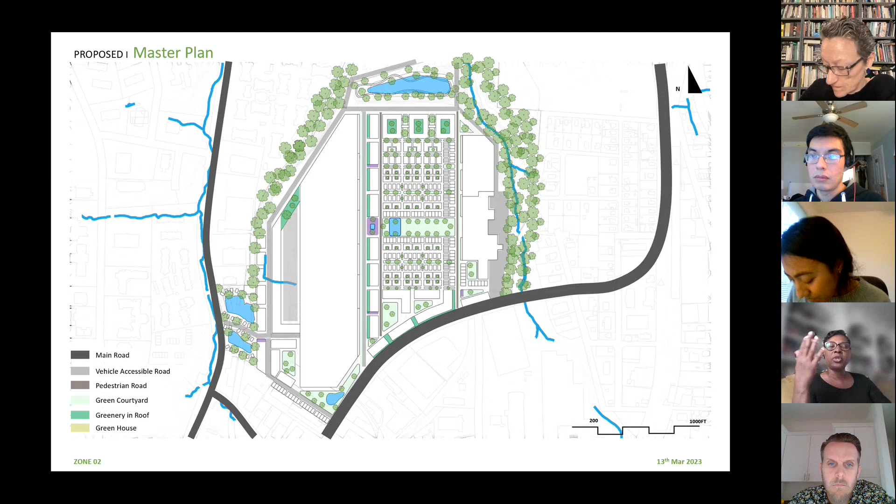And with that, without getting into all the details, it could also serve as a teaching opportunity, because I know they already have schools that come in and visit the farmers market, but it could also be an opportunity for educational purposes as well. Is that your thinking? Yeah, exactly, when we were researching the property we saw that they already offer tours that you can schedule with them, so we were envisioning this as an extension of that.

Okay, and I recently was at the farmers market. Do you know what the actual distance is? I do like the center, I like that very much with the different activities and housing. Do you know what the walking difference is between the current building and the proposed new building? So the plaza length is about 800 feet, and total it's about 900 to 1,000 feet for the difference between these two.

All right, that's all I have.

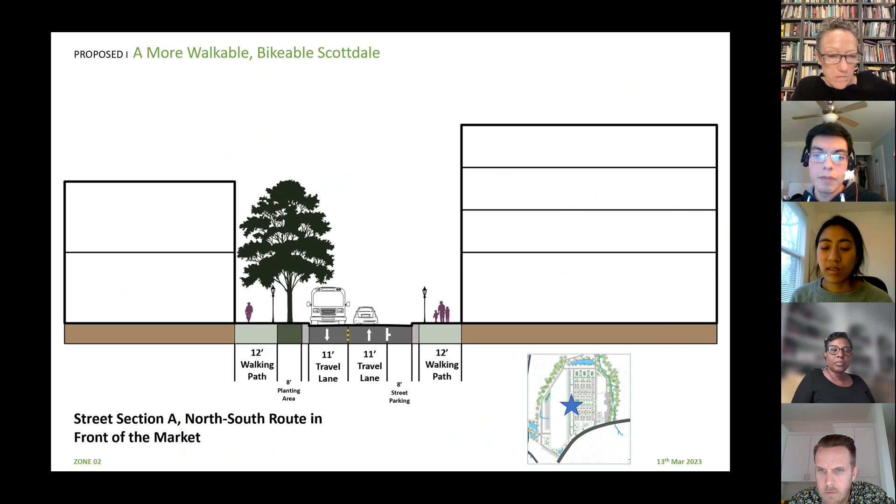So this would be the north-south connection. And then you would also do the street typologies. Yeah, go to the street typologies. Street networks diagram, in plan. Yeah, this one.

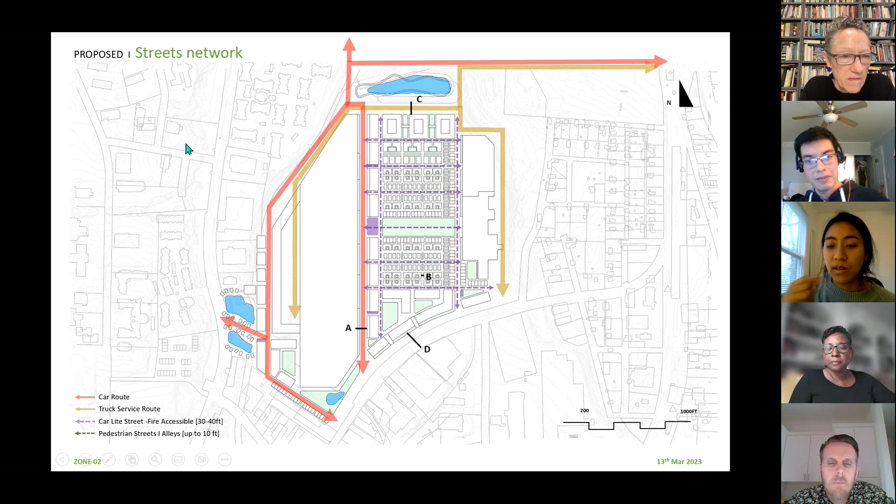So the bus, why don't you describe the Route 120 bus, what you're proposing? Madeline, you might want to show through the cursor, like which goes where. Yes, so the 120 bus.

Currently it runs along Ponce, but we would propose that the bus would get rerouted through our site and then connect north to North Decatur Road, which is also Site 1, so that the 120 bus could service more easily the farmers market by providing direct access to it. And then also providing more connectivity along the redevelopment for Site 1. And then it would just connect back up to its typical route.

Okay, that makes sense. I like that. In terms of just, because we've been talking about micro mobility and sort of entertaining the idea of even a more micro transit network, is there anything about this that could be adapted to an autonomous micro transit system? Is it basically the same infrastructure and bones, or would you design this grid differently, and connecting it to the other sites?

Ted, I think that's a great question, Commissioner Terry. It's not something we've really discussed at length, although Courtney Sung is on the call, and we have discussed with VIA that whether there's a driver or not doesn't actually change much. It changes the operational costs significantly, but the way that AV vans are already operating in some places, it doesn't change much. There's a little more infrastructure needed to make sure you've got really good connectivity so that the AVs don't suddenly stop.

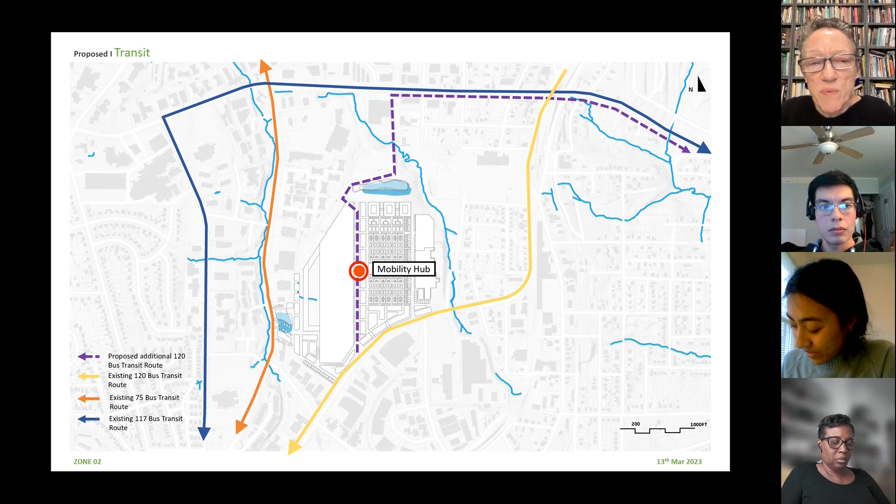Also maybe independent bike facilities on this north-south route in purple if you're going to jog your north-south streets within the urban fabric of the walkable area, or create a more dedicated bike facility within there. Did you guys understand the independent bike facility comment? Like a separated bike lane? Yes. That's definitely something we can consider. Thank you.

All right, fantastic. We do still have 2 minutes for closing comments, general observations, anything else anybody wants to suggest. These students are about to go on their spring break. What should they be thinking about in the back of their head? Are they being bold enough? Are they being too bold? What do you guys think?

I would never come into the lane of these aspiring students and professionals to tell them not to be too bold. So be bold, go for it. All we can do, as a collective body that's looking at ways to improve living and working and playing and shopping in DeKalb County, is to see what the possibilities are. I've always enjoyed being a part of these meetings to see what you students bring to us in terms of possibilities. So keep at it.